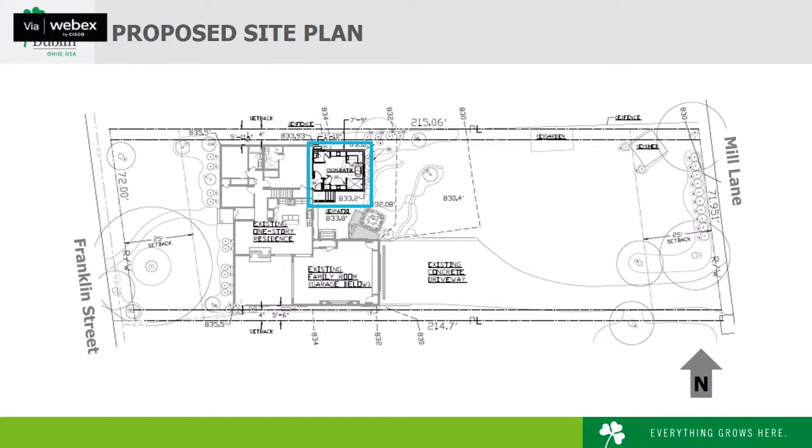The request before us tonight is a 286 square foot addition for a master bathroom. It's outlined in blue and located at the rear of the house.

This is the south section with Franklin Street to the left, showing the relationship of the proposed addition to the original form of the house and the 2020 addition that was approved by the board.

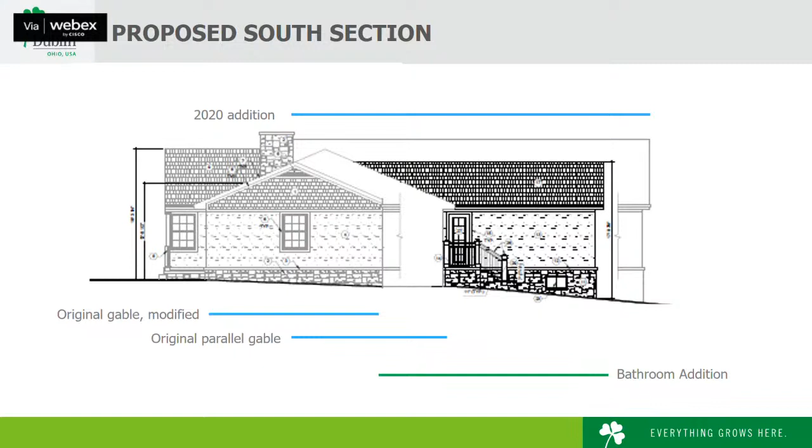The original house is on the left. The 2020 modified gable is fully rendered, the main or original gable is shadowed in, and the 2020 addition is shadowed in the back. The new bathroom addition is shown in the bold line weight.

This east elevation shows how all the different elements will work together. The 2020 addition is on the left, and tonight's request is on the right, again bolded.

Items of note include: the height of the addition is below the main roof, the addition is inset approximately 2 feet from the original house on the right side, and the materials are to match the existing house, which we'll cover in detail. The deck and stairs on the left side of the addition mirror those existing on the 2020 addition.

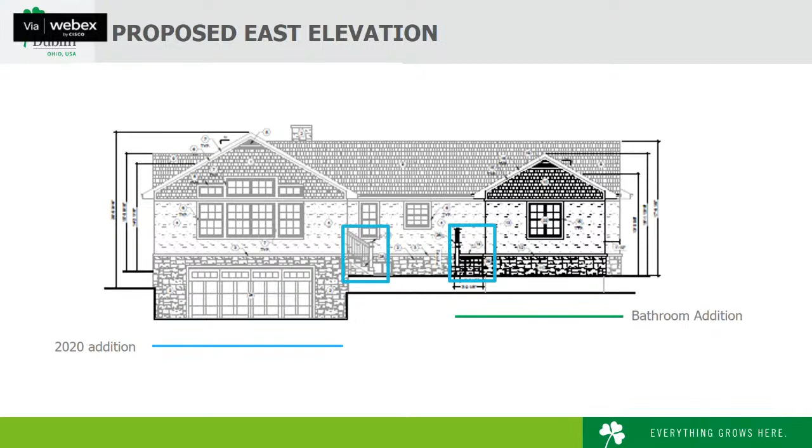Staff consulted with our preservation architect, and together we determined that consistency is really the greatest goal here. We did look at perhaps having this addition meet or more closely meet the current code and guidelines, and we really all decided that this is the best approach for this particular property.

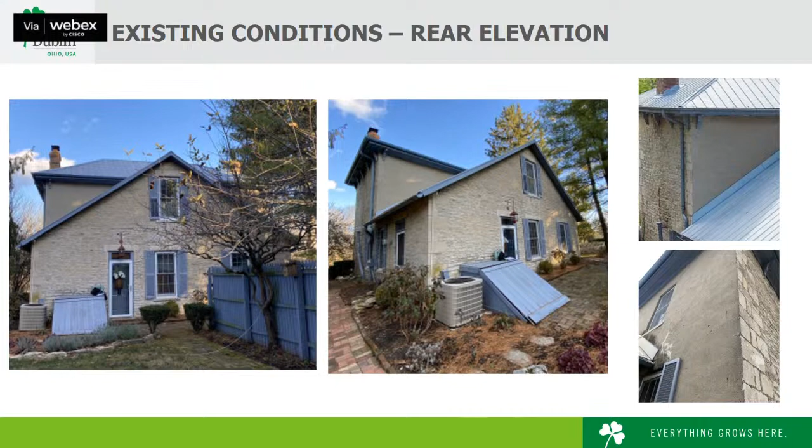5707 Dublin Road and 5715 Dublin Road shared a driveway, and there were concerns with regards to the easement. An easement agreement has been provided, and staff further consulted the law office and confirmed that this matter should be handled between the two parties privately. The board had concerns and reservations with regards to the plan form, elevation, massing, height, and materials. There were discussions regarding design alternatives, and the applicant was encouraged to pursue conceptual reviews.

This is the proposed site plan. The existing home is shown here in blue, along with the at-grade patio, shared driveway, and the shed in gray color. The applicant is proposing to add approximately 2,200 square feet to the existing approximately 2,350 square foot home.

The shed is proposed to be relocated to the southwest corner of the site within the setbacks, shown here in yellow. The red line represents the older footprint. The applicant has made changes to reduce the width of the home so it is not wider than the historic home, retaining its character facing Dublin Road and thus meeting the guidelines.

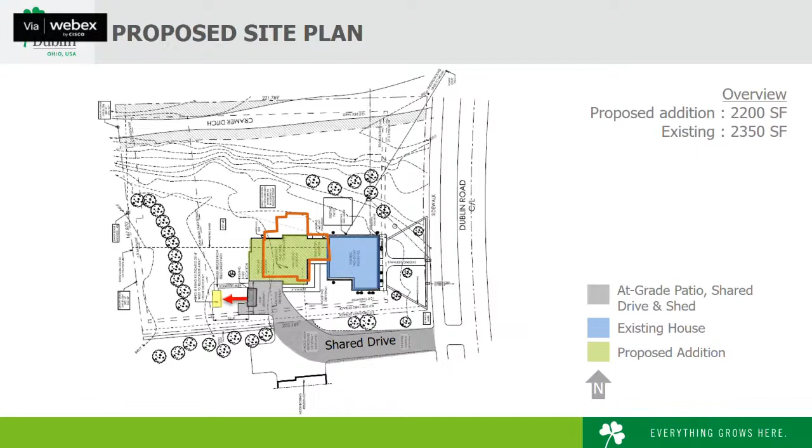These are the proposed north elevations along with the design alternative. Here on top, we see the proposed north elevation as Option A. The existing hip-gabled historic home is on the left in light gray color, facing Dublin Road, and the proposed addition is on the right.

The applicant has reduced the rear mass and eliminated the use of dormer windows. A 4:12 pitch side gable hyphen connects the rear facade of the historic home to the proposed two-story building addition. The rear portion has pitches of 3:12, 4:12, and 6:12. The maximum height of the proposed addition is approximately 22 feet 7 inches, and the height of the hyphen is approximately 12 feet 7 inches.

Staff recommended simplifying the roof pitches to meet the historic guidelines and further worked with the applicant to create Option B, in line with the recommendations, as a discussion alternative for the board, shown at the bottom of the screen. We can see a hip gable roof on the main addition and the use of a shed roof on the garage. There is an overall increase in height, however it is sensitive to the existing historic home. Staff will recommend Option B for the reasons outlined in the report.

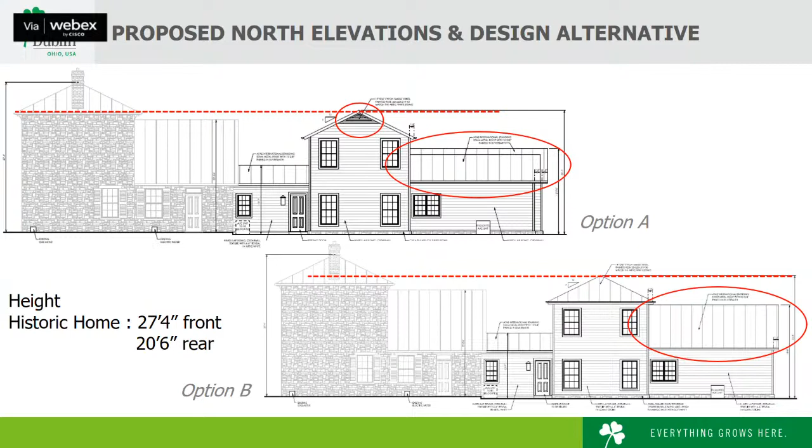This slide shows the south elevation with both Options A and B, very similar to the previous slide. The historic home is seen on the right in light gray, with the addition on the left connected via the hyphen. As discussed, with the use of the hip gable roof and shed roof on the garage, the addition has increased in height by approximately 1 foot.

Staff recommends evaluating a grading plan and considering an option of lowering the plan by 1 foot to minimize the height impact. A site analysis is also included in the staff report.

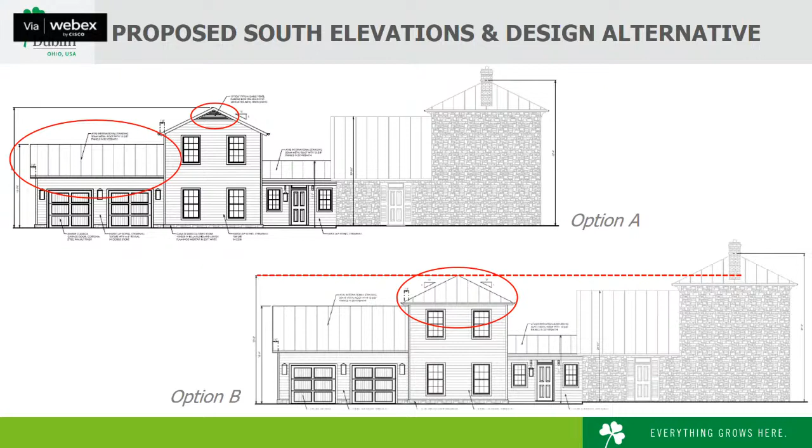With the recommended hip gable roof and its impact on the height, design strategies can be explored and the overall height can be reduced by lowering the basement height or stepping the finished floor level down, as described in the staff report.

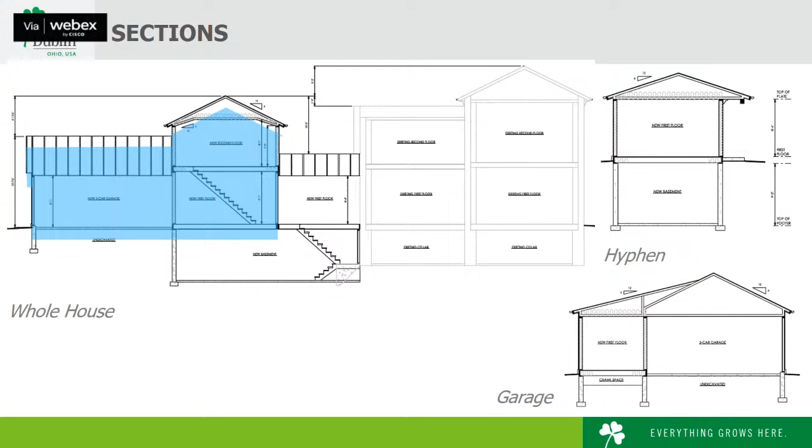These are the proposed materials. The applicant proposes to use Hardie Lap siding in Arctic White color for the hyphen and cobblestone color for the main addition, in a Cedarmill texture. Arctic White matches the existing shed. However, staff recommends using a smooth texture to match the historic wood siding, and this is included as a condition of approval. The applicant proposes cultured stone in Bella Blend at the water table.

Staff recommends providing a stone and mortar mock-up. The applicant has confirmed that stone sills and headers are not being requested for the windows and doors, though they were previously included in the staff report. The metal roofing colors will match the existing roof color in the Silversmith color, which staff supports.

Anchorage outdoor wall mount lights are being proposed on the north and south facade, and staff supports that. The garage doors are Amarr Classica doors in walnut color. A waiver will be required for that.

Applicant proposes aluminum-clad windows, which are not shown here, but they were previously approved in 2021, and they will match the existing home windows. Apart from this, all windows, frames, rakes, and soffits are to be painted in Sherwin-Williams paints to match the existing blue and gray trim.

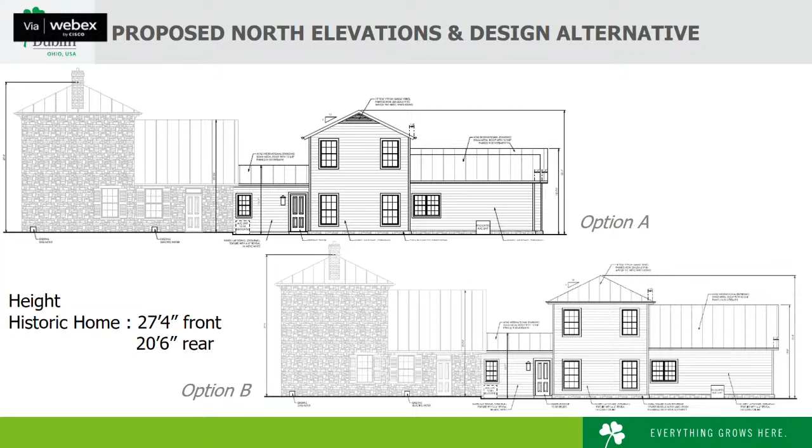I know Heidi, you had some concerns as well with just the size of that. Yeah, the scale just seems really, really wide, especially from that west elevation. And looking at other homes through Old Dublin and different historic homes within Dublin, unless you have a barn, there is nothing really that wide that's been constructed.

How about the height of the volume of the house, the volume of the addition beyond the garage? Michael's question, part of that is, why do you like the actually lower version with the gable that actually looks taller? That's what the staff has done you a favor by suggesting the hip, because it does two things, even if it isn't lowered.

It gives the perception, because there's less wall surface that's visible, that it's much lower than the gabled version. It also ties back to the house better. The other thing is it takes your eye away from something that's insignificant. The focal point of the gable is the vent, and that vent's not significant. It's not a consciously designed architectural element, it's something that comes out of the catalog.

So I would not say it had to be lower if it was option B in that area. And I would say we feel the same way. As long as we don't have to cut into the interior ceiling height as suggested in option B, we would be okay with doing the hipped roof at the higher height, because you raised the plate height.

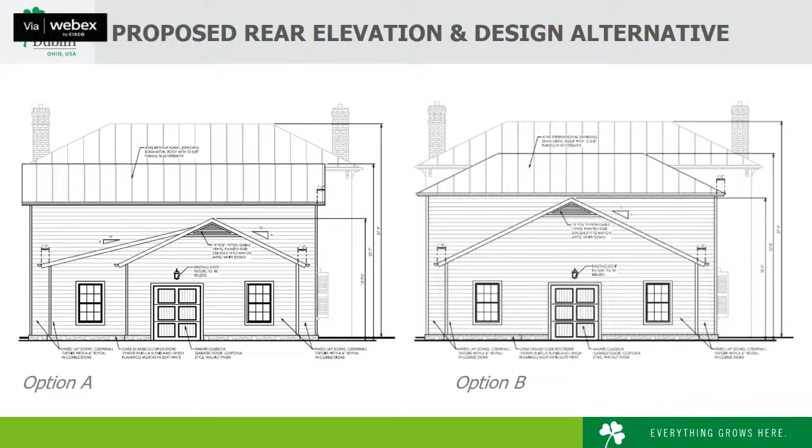So I was wondering, do we really lower the pitch on that? But it's still going to be pretty big. So I thought some version of the hybrid that Roddy put up earlier maybe the best approach back here. But that's just my opinion, I don't know how other board members feel.

Is that identical to what option A was? Almost—just her outline that she had drawn, is that identical to what we had in option A? The hybrid is effectively the larger structure from option A, I'm trying to remember... it's the garage from option A and the hipped roof from option B. They're just identical, there's nothing overlaid or changed in option B, the blue outline and the hybrid.

Andrew Stowe, 5707 Dublin. Just to make sure we're all talking about the same thing: we're looking at the drawing on the right, and we're saying the 2-story volume of your addition with the hip roof at that height is generally fine. And we're saying what's in blue, which is kind of like your option A, but I've mentioned a couple tweaks I think would make your idea work better—lowering that roof to a 2:12, because your goal is to break the volume up, and I think that's a problem back there. But I think your idea would work better that way.

But I also want to just talk about that being an additional roof and breaking up the structure. I believe that last time, our last submission with all the dormer roofs and things like that on the house, we had close to 9 roofs on the house and we brought it down to 4. So we've also taken your comments into consideration—taking it from one large oversized roof on option B and breaking that up into 2 separate roofs.

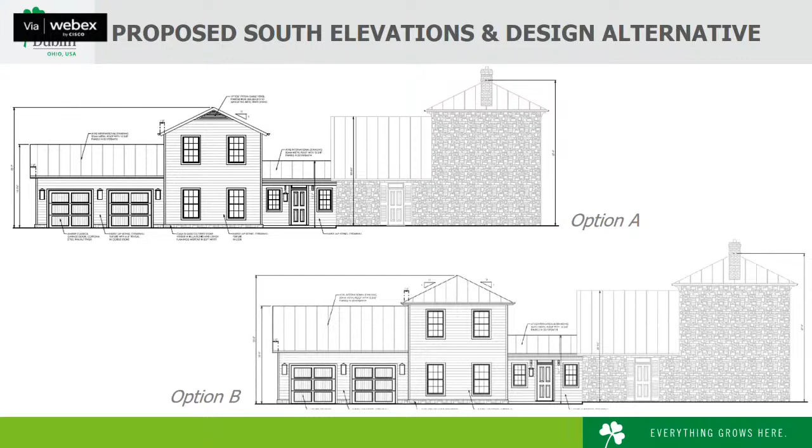This is a material question we need to talk about in the future too, because we keep having these material questions come back down the road. Understood, yeah, because typically we don't approve metal doors since there are other materials available.

Are you hung up on this metal door, or are you okay with options? This was the first time we discussed this to any extent, so no, we were not particularly married to it. We really looked at it for the composite look and durability. Is the specification information handy - is it a metal structure with a synthetic finish on top?

Give us one second. So typically it'd be a composite then, because the way it's specification drawn and submitted.

It can't be just painted metal, I'm thinking it's a composite. Structurally it's metal, but it has something else, and that's what I think it is. We could Google it. I don't see it looking like it's on one of the standard options, and I don't see anything about the garage.

Was that information provided with the first application? So the garage doors are triple layered heavy gauge steel, with a 5-layer paint system done on the doors. So it's just paint on the door? Yes, it's painted in a wood texture and it is steel from inside.

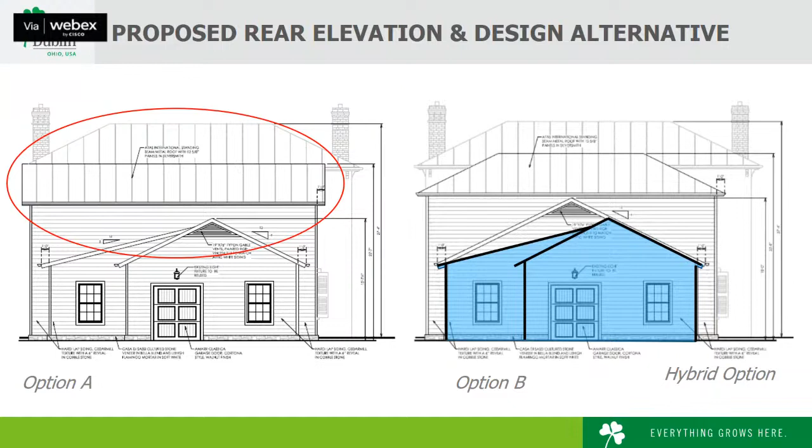All right, do we have everything rewritten? Let's review the language once more since we have two, possibly more lawyers on the board. So let's just read through this and make sure everybody's comfortable with it.

Just to mention, number 7 should still say cultured stone or cultured limestone—I don't think Roddy heard that when we mentioned it. And do we need to renumber those two? It could be written so that if you want to go back to that, I can give you some language for the water table.

Cap on the water table shall be cultured stone or limestone, because it's really the cap we're talking about. Then you have the option—you can do cultured stone or limestone. The cap is what's on top, so it's the cap on the water table shall be cultured stone. It has to be a veneer. It shall be cultured stone or limestone, to be approved by staff prior to building permit. Is that okay?

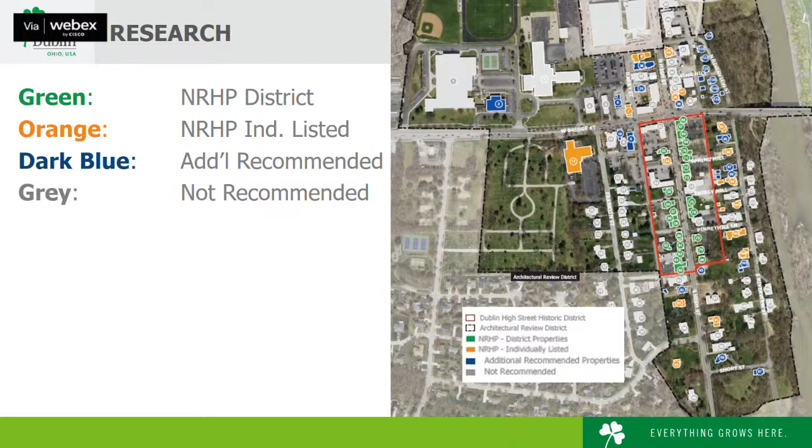So it's not, we're preserving a majority of those that are truly historic from that 1830s to 1920, and again, additional ones outside that time period for their iconic status. Because again, there's a number of properties that are already not contributing. So the ones that would be able to have this lesser scrutiny is around 18.

Council's discussion, as I mentioned, was to remove this contributing, non-contributing language. So we would come up with some other nomenclature, whether that's local landmarks or some other distinguishing language to help us understand what this might be.

Looking at the demolition criteria, so right now it's 1 of 3. Previously it was 2 of 4, and there was a 4th criteria. So I think we're all open to what that looks like, so that you all feel like you have enough opportunity to scrutinize applications that come before you, and any other minor related changes in the code.

Council also discussed the opportunity to potentially expand the administrative approvals opportunity. So if someone's doing something really minor, whether it's lighting or things that you would typically leave to staff to approve at a later phase, and again, we can come up with what those criteria would be and those instances would be. But again, trying to make it user-friendly for applicants, for residents, so they wouldn't necessarily have to go through a process if it met the appropriate criteria. So looking at what those administrative approvals might be as well.

So then, as I mentioned, I had an opportunity to meet with some residents within the historic district on Saturday morning. There were about 35, 40 residents in attendance. I gave a similar presentation talking about the background, council's discussion, and then had some dialogue and questions with them.